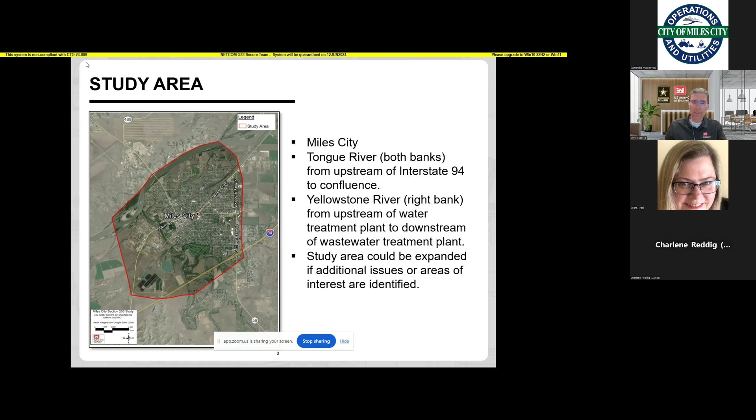What we would do is the overall process for a feasibility study, and this would be the same under Section 205 or the General Investigation Program: first identify the flood problem, then identify and evaluate different alternatives for managing the flood risk. Those fall really generally into structural alternatives like dams or levees, or non-structural alternatives like flood-proofing structures or relocating structures.

And then the Corps is required to determine what's called the National Economic Development Plan, or the plan that contributes most to the national economy. Other plans can be determined as well, like a locally preferred plan if the sponsor prefers something different than that NED plan. And then we would complete a feasibility study report and submit that for approval.

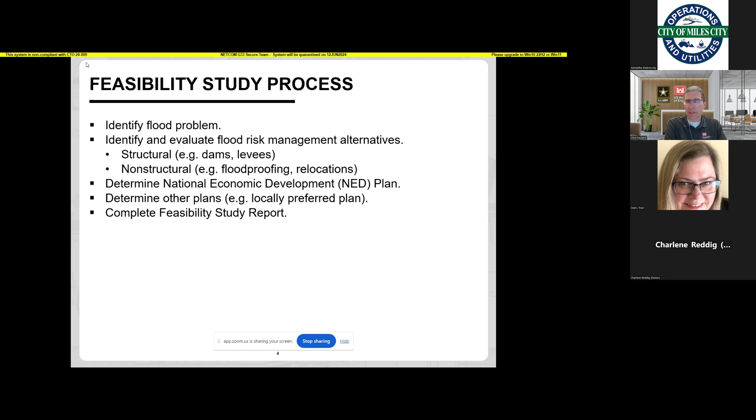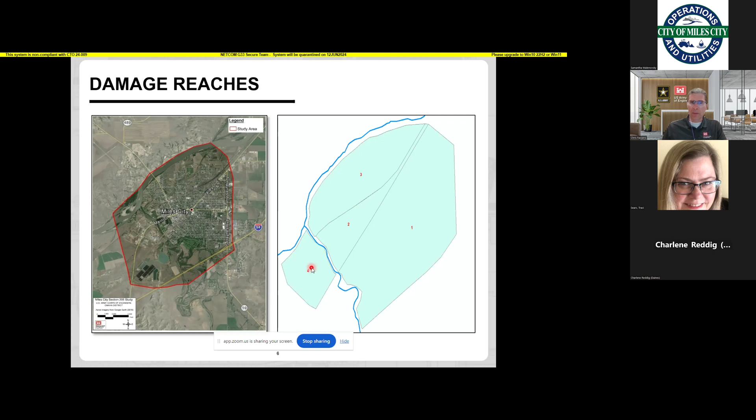And what we did in this study is Reaches 1, 2, and 3, which are all on the right bank of the Tongue River, and then Reach 4, which is on the left bank. With those 4 study reaches, we looked at an evaluation of existing conditions, so essentially looking at what the existing flood damages are in each of those reaches. And we developed an initial array of alternative plans. So there's a little bit of history of what we did there.

We had a workshop at Miles City in December of 2018, so it's been a number of years ago now. Then we did initial screening of those alternatives and reduced those down to 12 different levee alignments. Then we looked at those further to see if there were different options for specific areas, say using a flood wall instead of a levee in an area where real estate was particularly constrained. And then we did a preliminary economic analysis of those levee alignments and some non-structural measures.

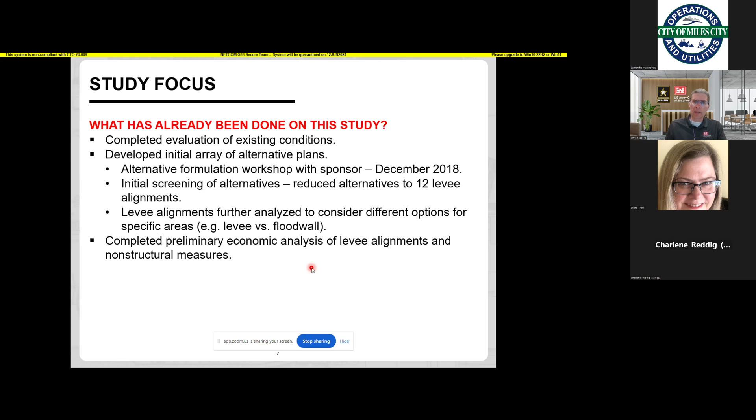As a quick summary of the alignments that we looked at, this shows the different alignments, generally following the alignment of the existing levee. We also looked at a setback alignment, which is set back from the current levee alignment and would terminate before it turned and went down along the Yellowstone River.

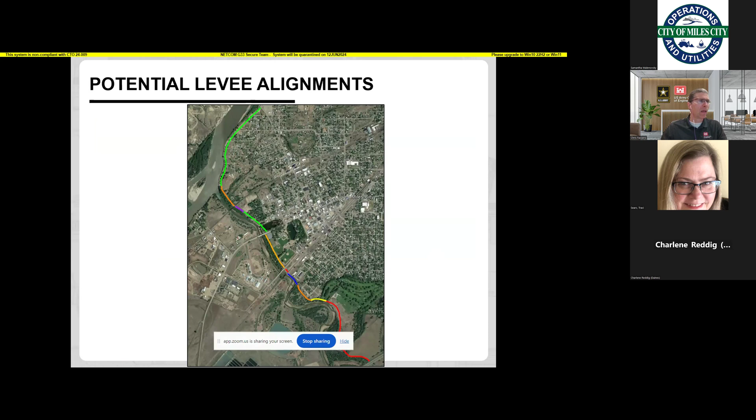And we had two kind of bookends, I guess, on that alignment. We had low riprap and high riprap. And so the riprap is basically just a large rock that is used to armor the bank. And we had to make assumptions about what would be required for riprap. And in particular, along the stretch that follows the Yellowstone River, it was quite high, the amount of riprap and the size that we had to assume.

And in either case, the total cost would have been more than what's allowed under the Section 205 program. So we decided under the Section 205 study not to spend a lot of money trying to refine that riprap estimate, because regardless, the project was still over the Section 205 project cost limit. And instead, we looked at this setback levee along this alignment generally, so back from the Tongue River and not running along the Yellowstone River. And with that, there was an elimination really of the riprap requirement because of the setback.

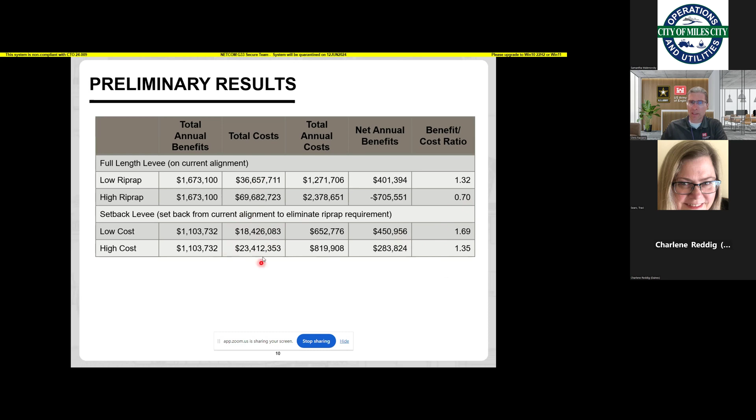And so kind of a summary of those results is that the actual riprap requirement would be somewhere between that low and high estimate. So there could be an economically feasible levee project that's either on the current alignment or the setback alignment. But because of that maximum project cost for Section 205 of about $15 million, the project couldn't be implemented under the Section 205 program. And we looked at non-structural measures as well, but those wouldn't be economically feasible just because of the large number of structures that would be required to be flood-proofed.

So when we think about non-structural measures for this study, the area where those might apply would be more on the left bank of the Tongue River where there are fewer structures. So maybe instead of trying to protect those completely with a levee, for example, additional non-structural measures could be done on that left bank to protect individual structures. But as a standalone alternative, non-structural measures were not economically feasible.

And then we also did a preliminary life loss analysis that would indicate that there'd be the potential for loss of life from more severe floods, and that can sometimes be used as a non-economic justification, but we didn't think that would be a strong enough justification to overcome the fact that we were above the Section 205 cost limit, or in some cases, maybe not economically justified.

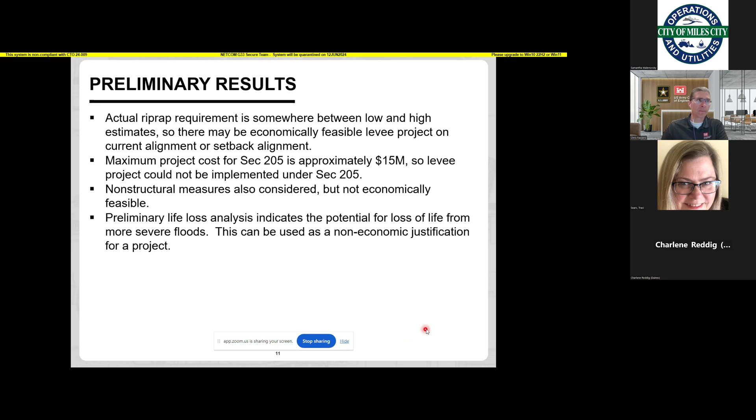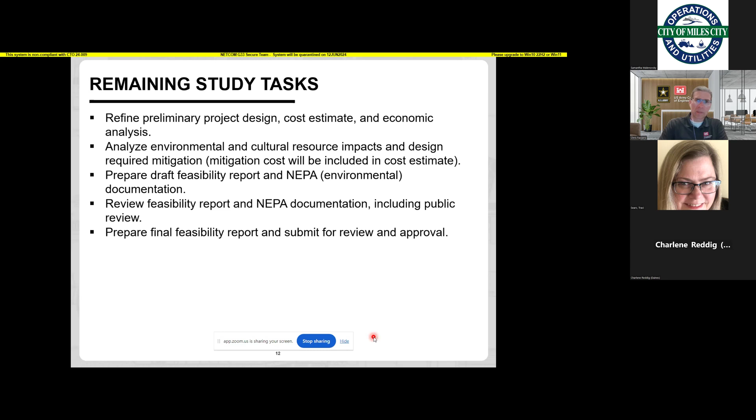And so we identified the remaining study tasks that would have to be done: refine that preliminary project design and the cost estimate and economic analysis. And then we would have to analyze environmental and cultural resource impacts and design any required mitigation. So if there's any impacts to those environmental or cultural resources, like tree removal, for example, we would have to design that mitigation. And then we would have to do our draft feasibility and final feasibility report and our NEPA, or environmental documentation. So we do a draft report that would be reviewed, and then a final report that we would submit for review and approval. So those are the remaining study tasks that we had identified.

But when we looked with the city at study options, Section 205 was really no longer an option unless there was an increase in the Section 205 project cost limit, and that to date has not happened. And so we looked at the possibility of continuing under that general investigations, or GI program, that I mentioned earlier.

And so the only difference between the Section 205 and GI program in terms of cost share: you can see that the feasibility study is still a 50-50 cost share. Design and construction is still a 65-35 cost share. Operations and maintenance is still 100% non-federal, but the maximum total federal share is unlimited for a GI study.

So that Section 205 project cost limit that we were running up against is removed with the GI program. Now the catch, if you will, is that the Section 205 program is what's called a continuing authority. So the Corps of Engineers gets funding each year for conducting Section 205 studies and for implementing Section 205 projects. So if a project is approved for implementation under Section 205, then there's no separate authorization needed to implement the project. It can just be implemented as soon as funding is available.

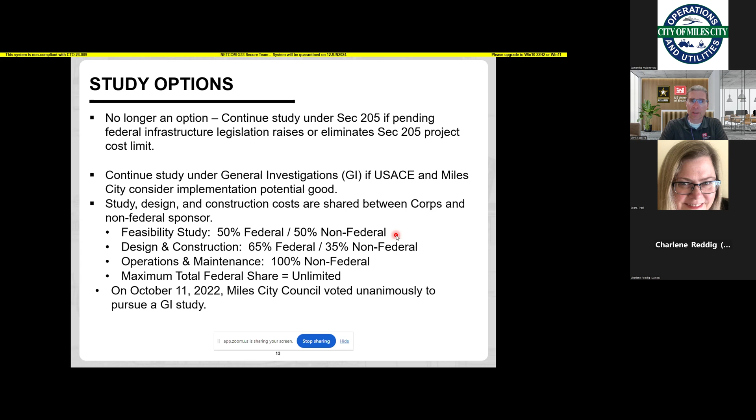So since that time, we have gone through the process of winding up the Section 205 study, which involves making sure that all of the work in kind that the City of Miles City did as part of the cost share got credited. And then we have to basically balance the books, so make sure that the 50-50 cost share is balanced. And then we closed out that study. And once that was closed out, we were able to request a GI study.

And so the city supported that request by providing a letter of support from the city, and then letters of support from other stakeholders in the city, in Custer County, and then the state of Montana. And we went ahead and put in that GI study request.

So what we know right now is that the FY25 President's budget has been released, and GI study funding for Miles City was not included in the FY25 President's budget. So that's the federal fiscal year that begins on October 1st, 2024. Now, that is not to say that it might not be included in the final budget for FY25, but we just haven't seen that yet because Congress, of course, determines the budget, but the president starts that process, and it wasn't included in that FY25 budget.

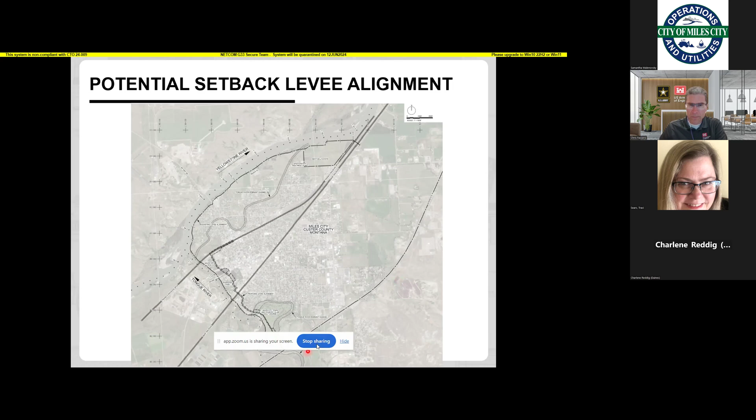Gary Cridland here. Has the city determined or chosen any alignments out of those that you have? I don't know if that's a question for Sam or for me, but out of the alignments that we have, we didn't make any determination as far as one that we would want to recommend. We've really gotten just as far as figuring out if there's something that meets our economic justification criteria, because that's the bottom line for whether a project would be approved, whether it has positive net annual benefits.

So beyond just determining that there could be a feasible project, the Corps hasn't determined or recommended a preferred alternative. And I don't think that the city has either, but I'll let Sam or someone else address that. No, the city has not yet. We have only expressed interest in what we would like to see. I don't think we're far enough along to really make that determination. And also we would get public input on it before we did anything.